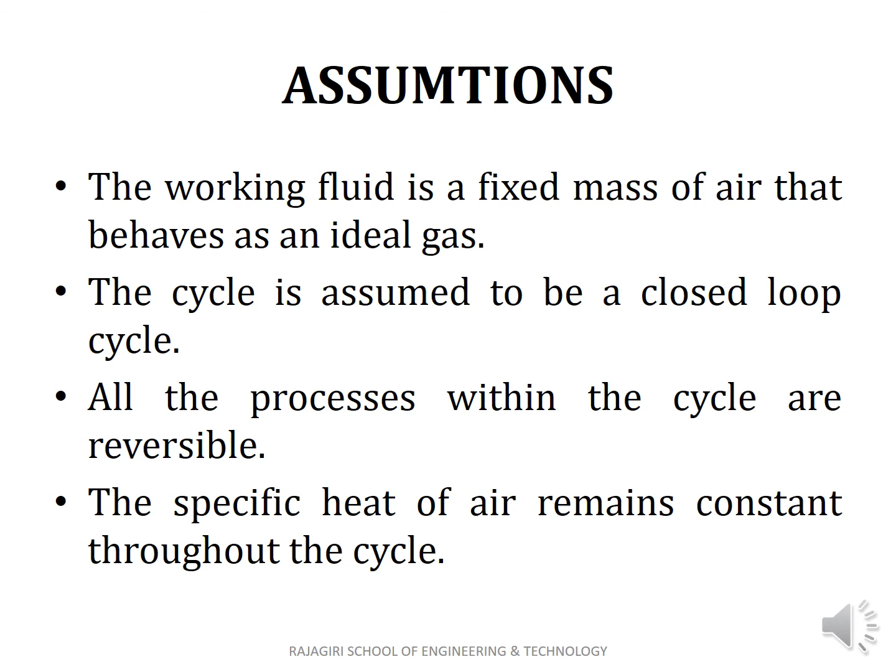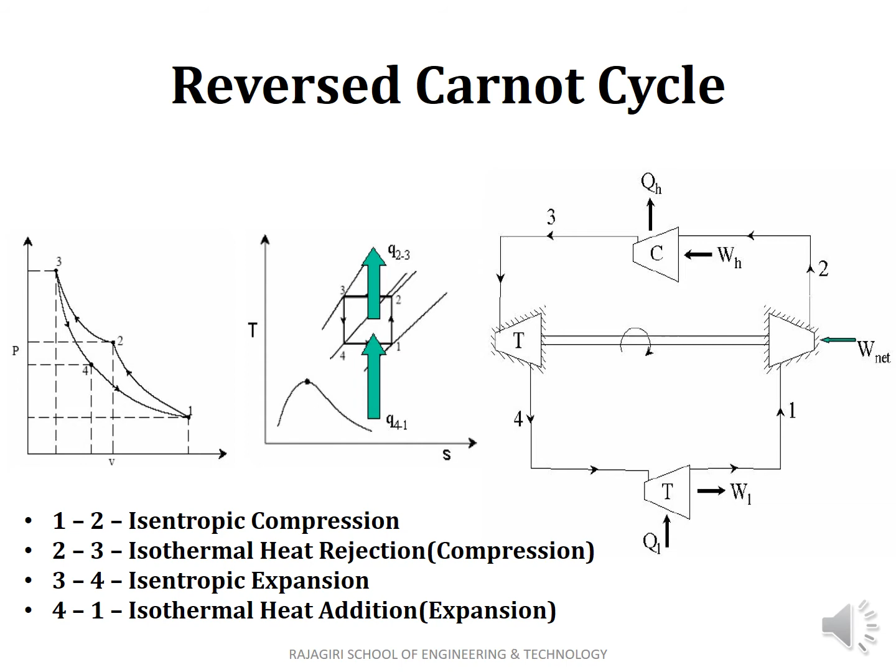S1 equal to S2. The entropy of points 1 and 2 is same, and entropy of points 3 and 4 are same. So we can write TH minus TL into S1 minus S4. So you can cancel these two terms. Finally you will get COP of a Carnot refrigerator is TL divided by TH minus TL. So it is clear that the COP of a Carnot refrigerator depends only on the working temperatures.

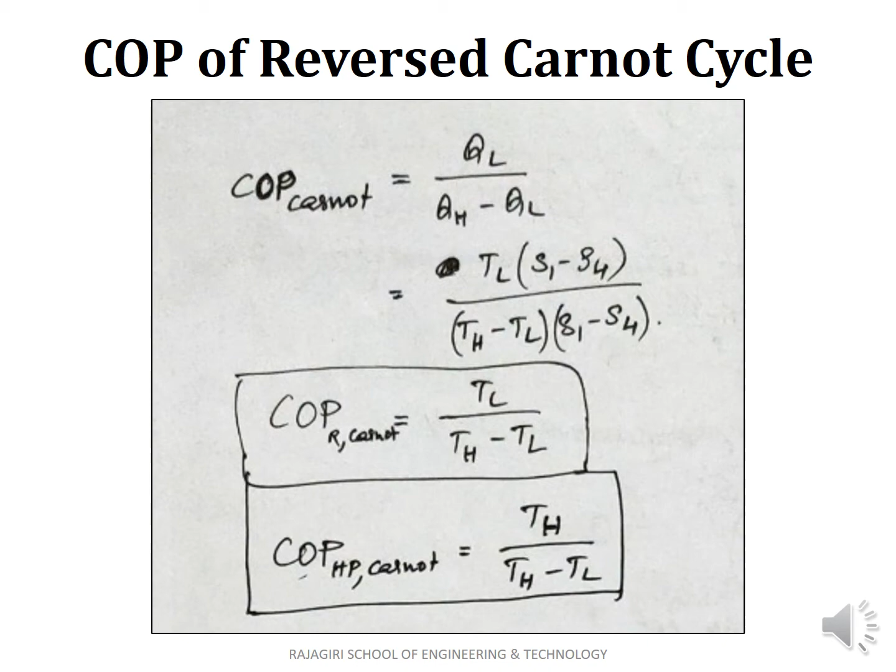Same way you can find the COP of a Carnot heat pump, which is equal to TH divided by TH minus TL, where QH is the desired output. So the reversed Carnot cycle is an ideal cycle for constant temperature heat source and sink. All the processes in a reversed Carnot cycle are completely reversible, so the cycle itself is a completely reversible cycle.

As from the expression in the previous slide, we can say that the COP is a function of high and low temperatures only. So the applications of air refrigeration are aircraft cooling and liquefaction of gases. This is the application of air cycle refrigeration.

But this reversed Carnot cycle has some limitations. The first limitation is the isothermal compression, that is the isothermal heat rejection process, and the isothermal expansion, that is the isothermal heat absorption process, are difficult to achieve in practice. Also, in this cycle, you have small volumetric refrigeration capacity and also have high volumetric flow rates of air.

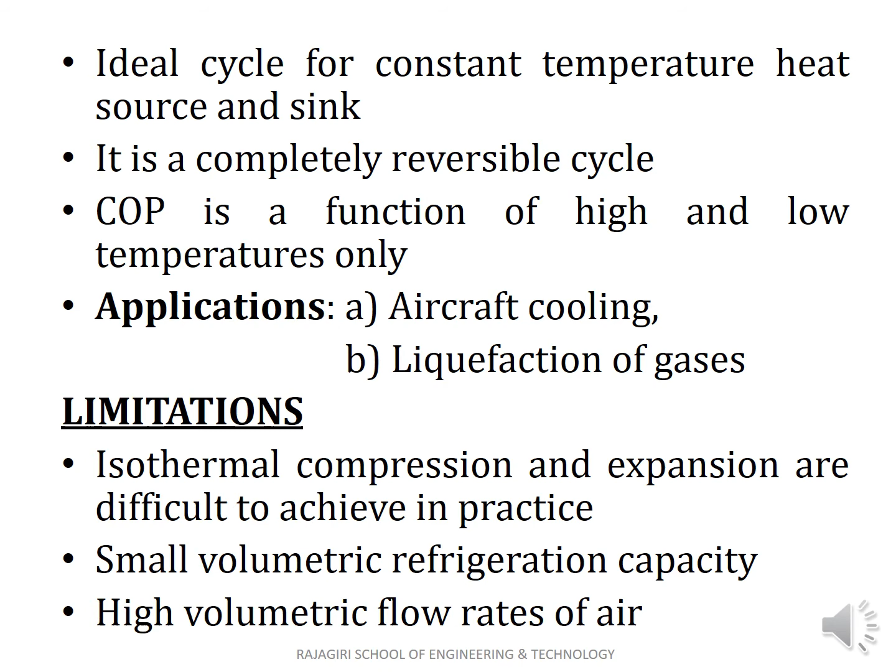Because of these limitations, we introduce another cycle which is called the ideal reversed Brayton cycle, which is also called Joule cycle or Bell-Coleman cycle. In this cycle, as you can see from the flow diagram, we have replaced two isothermal processes, that is isothermal heat rejection process at a high temperature and isothermal heat absorption process at a low temperature,

with isobaric processes, constant pressure heat rejection and constant pressure heat absorption processes, by replacing the compressor and the turbine with the heat exchangers. Here this is the high temperature heat exchanger and this is the low temperature heat exchanger. The other two processes are same. We are using a compressor and turbine to compress the air from 1 to 2.

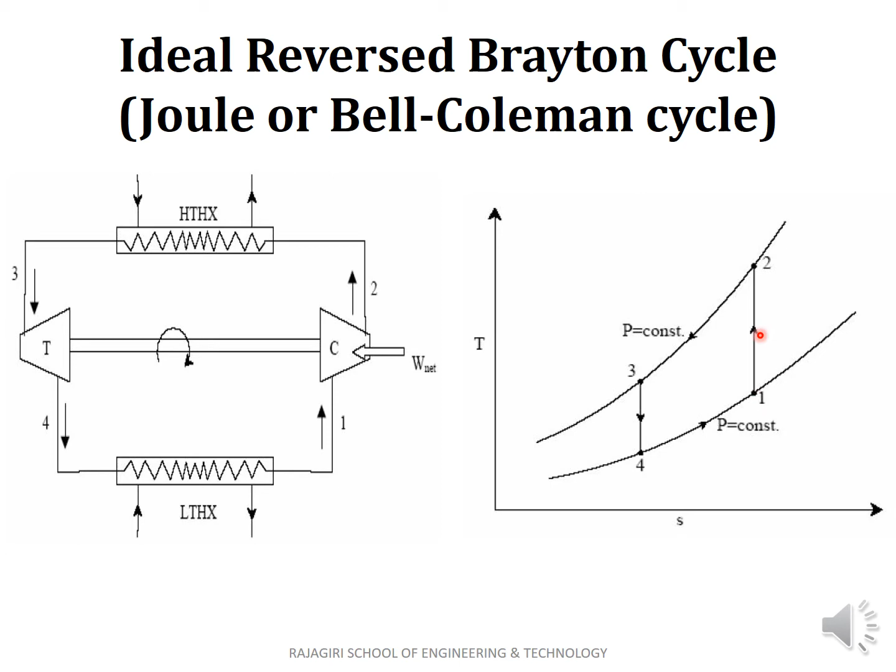This is an isentropic compression process. In that process, the pressure and temperature of the air increase. Then it is passed through the heat exchanger, which is a reversible isobaric heat rejection process. So the air temperature decreases but the pressure is constant.

Then from state 3, the air expands through the turbine, which is the reversible adiabatic or isentropic expansion process. So the air gets cooled, its temperature and pressure decrease. That low temperature, low pressure air is then passed through another heat exchanger, a reversible isobaric heat absorption process. Through that heat exchanger, the air absorbs heat from the space where we need to maintain a cool atmosphere.

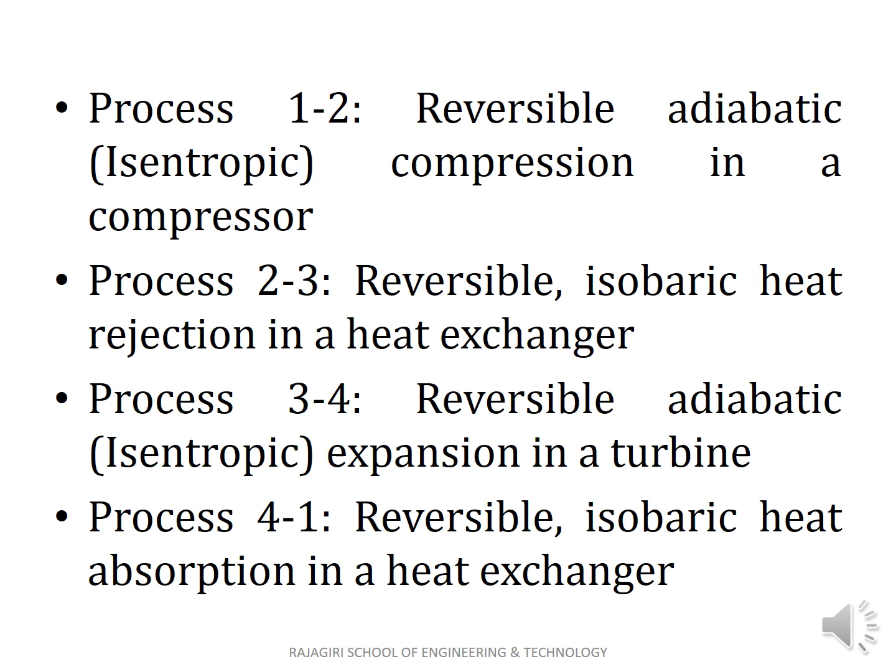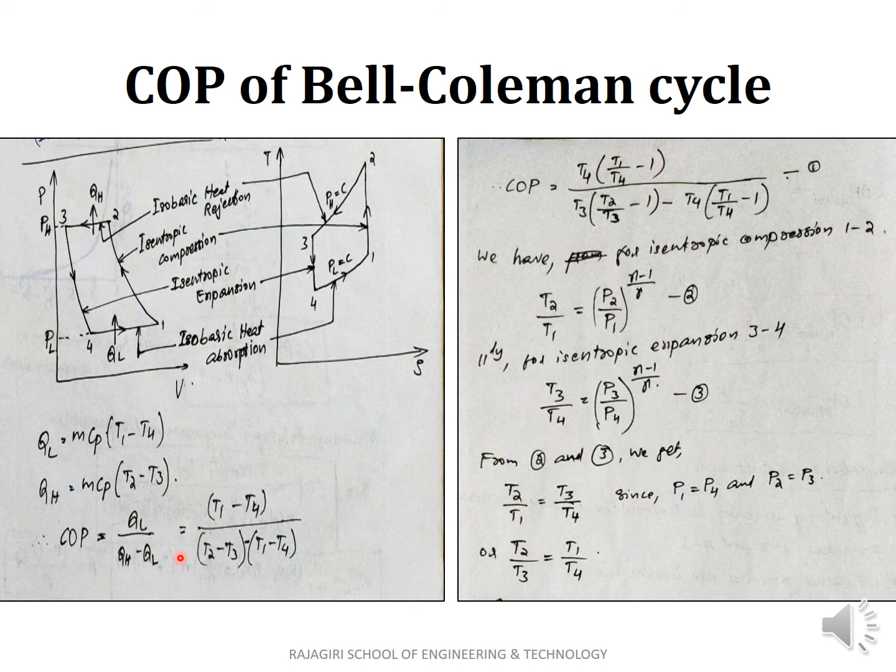If the compression and expansion processes are not isentropic, if they are polytropic processes, then the COP of the Bell-Coleman cycle will be equal to mCp into T1 minus T4, which is the heat absorption or refrigeration effect, divided by mCp n by n minus 1 into gamma minus 1 by gamma into T2 minus T1 minus T3 minus T4.

As we know, the COP is refrigeration effect divided by work done. For a polytropic process, the net work is the compression work minus the expansion work. So W net is equal to n by n minus 1 into P2 V2 minus P1 V1.

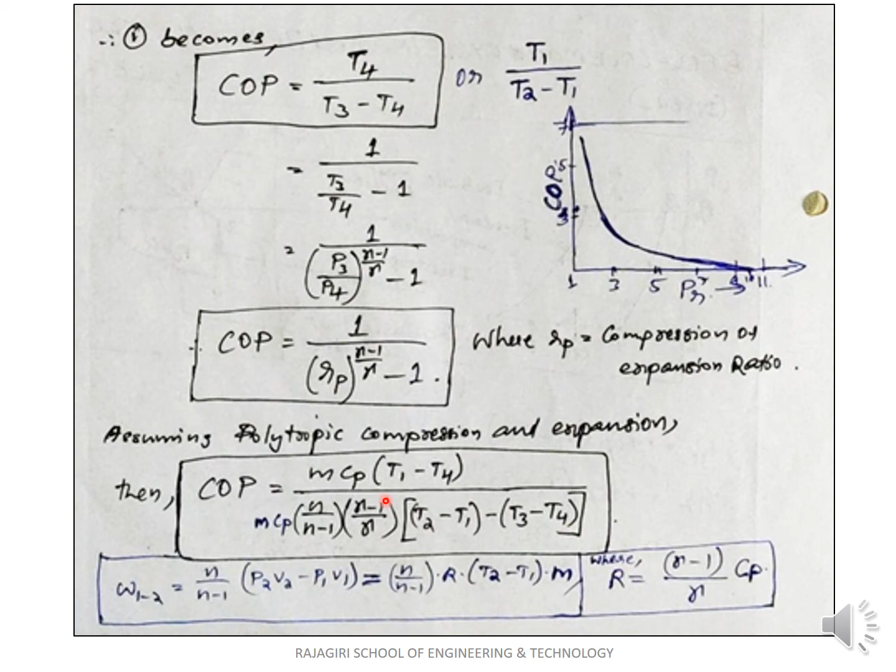So by substituting all these terms, we can represent the work term as mCp n by n minus 1 into gamma minus 1 by gamma. So Cp into gamma minus 1 by gamma is R, n by n minus 1 is the term, and m is the mass flow rate. Within bracket, T2 minus T1 minus T3 minus T4. If the compression and expansion processes are polytropic, this is the expression for COP of a Bell-Coleman cycle.

The COP of a reversed Brayton cycle is equal to T4 divided by T3 minus T4, or you can use another expression, T1 divided by T2 minus T1. From this expression you can easily understand that the COP of a Carnot cycle is always higher than that of a reversed Brayton cycle, because T3 minus T1 is the term in the denominator, and the term in the denominator of the Brayton cycle is T2 minus T1. This term is higher than that term. So the COP of a Brayton cycle is always less than the COP of a Carnot cycle.

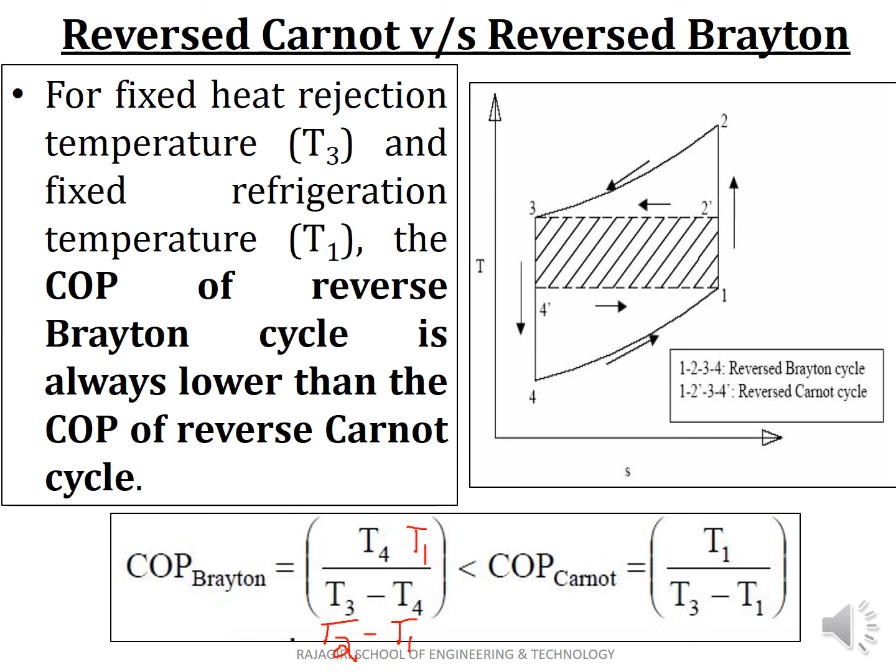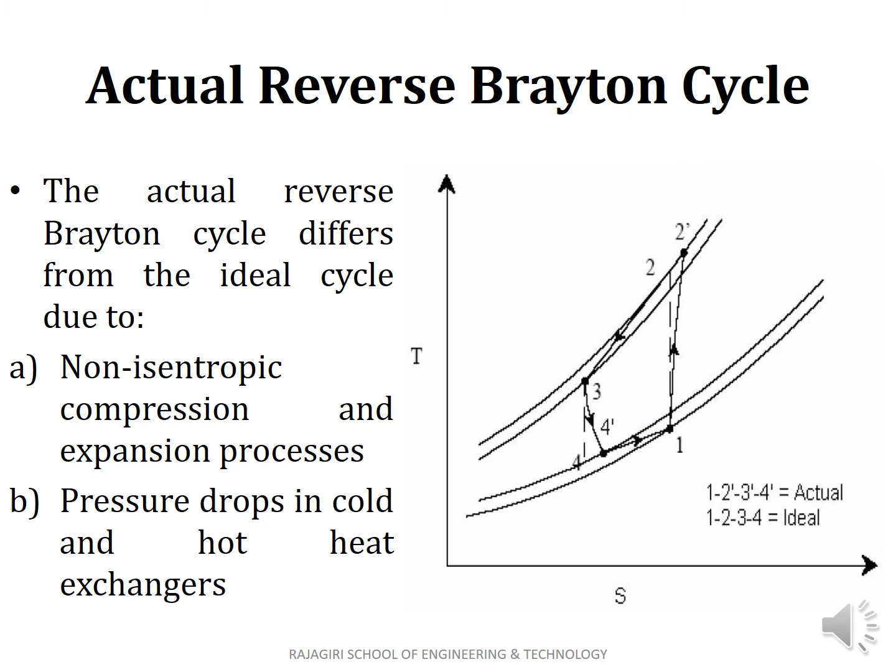See this figure: after expansion the air state is point 4 dash. Because of this non-isentropic expansion, the refrigeration effect also decreases. As a result, the COP of the actual reverse Brayton cycle will be considerably lower than the ideal cycle, because of the decrease in refrigeration effect and the increase in net work input. Design of efficient compressors and turbines plays a major role in improving the COP of the system.

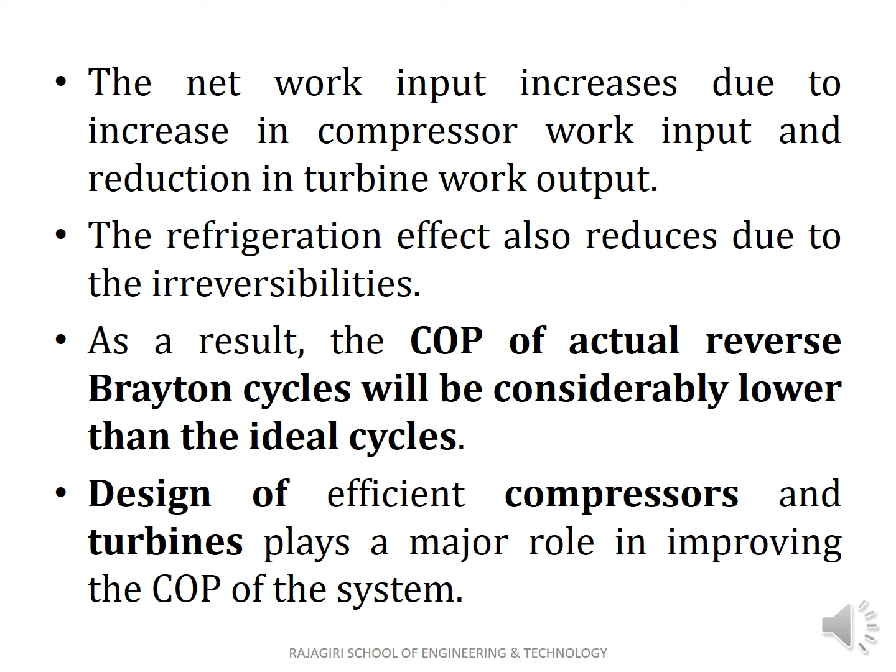There are basically two types of air refrigeration systems: open system and closed system. In an open system, there is no cold heat exchanger or low temperature heat exchanger. The cold air at the exit of the turbine after expansion flows into a room or cabin, and it freely moves out to the atmosphere. We take fresh air for the next cycle. In such a case, the low side pressure will be atmospheric. There is no low side heat exchange process, no heat absorption process in an open cycle. This cycle is used in aircraft refrigeration.

Now, the other one is the closed system. The same gas or air flows through the cycle. We are not taking fresh air for each cycle; we reuse the air again and again. In this type of system, low side pressure can be above atmospheric, and these systems are known as dense air systems. So here we have a low side heat exchanger, and in these systems we can use gases other than air, for example, helium.

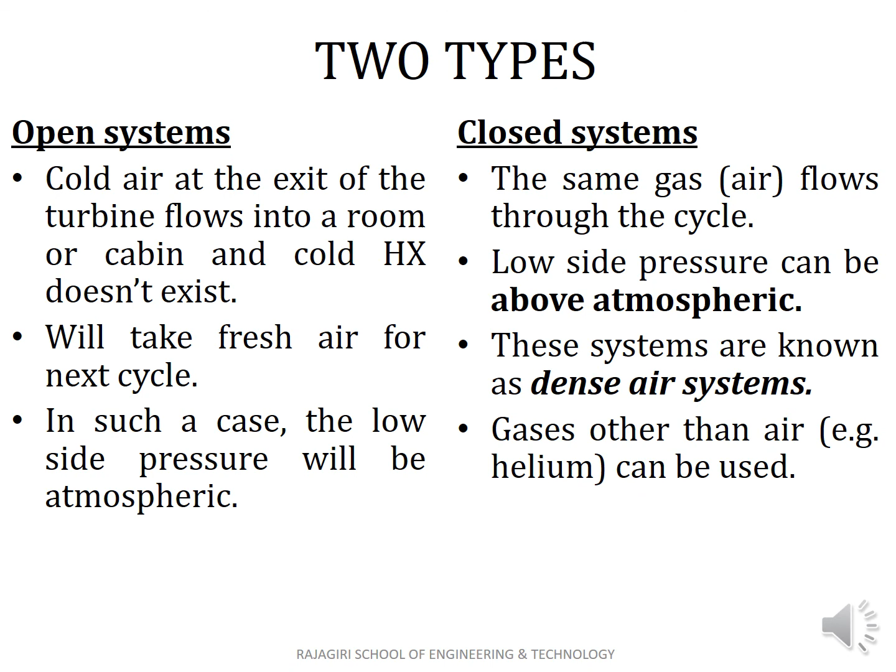So this lecture covers all the basics of the air refrigeration system, the ideal cycle, and also the actual Brayton cycle for air refrigeration.